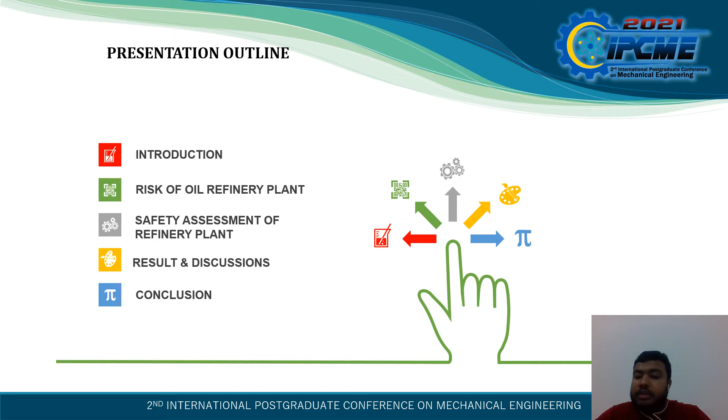These are the contents of our presentation: introduction, risks of oil refinery plant, safety assessment of refinery plant, results and discussion, and conclusion. This is a schematic diagram of an oil refinery plant. We know that in an oil refinery plant, crude oil is refined into different kinds of fuel, like jet fuel, diesel fuel, fuel oil, heavy fuel, gasoline, etc.

This is not our main concern to discuss the oil refinery plant, but our concern is to know the idea about the oil refinery, because we want to make the safety analysis of these oil refinery plants.

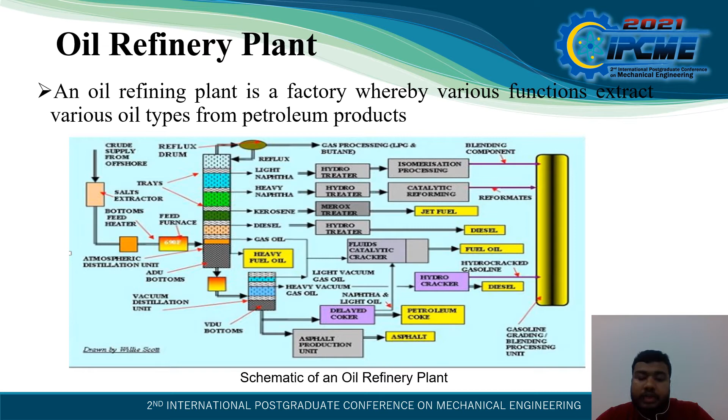This is the true figure of petrochemical companies' fire explosions. One is from China, in 2005, at Jilin petrochemical company, a fire explosion. You can see figure 1, top figure, and the second figure is for Jubail petrochemical company in Saudi Arabia. It happened in April 2016. A lot of people died and a lot of people were injured, and not only that, but the effect after the fire is heavier.

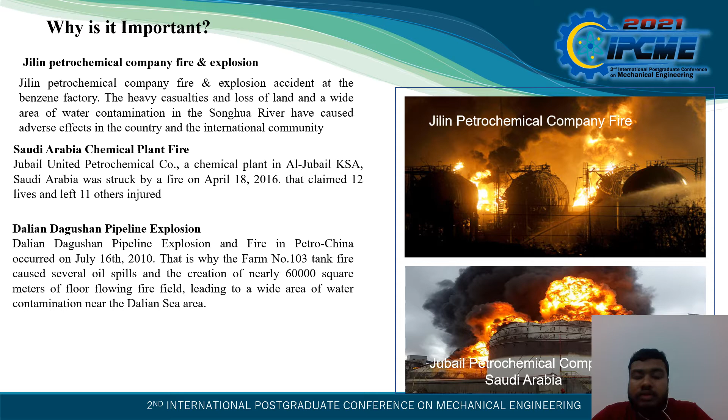In the next picture, you can see the river water is polluted by the burning fuel and oil, and you can see the firefighters are swimming in the river to rescue people. For this reason, we are very much concerned about fire and safety analysis in oil refinery plants, and that's why this is our study.

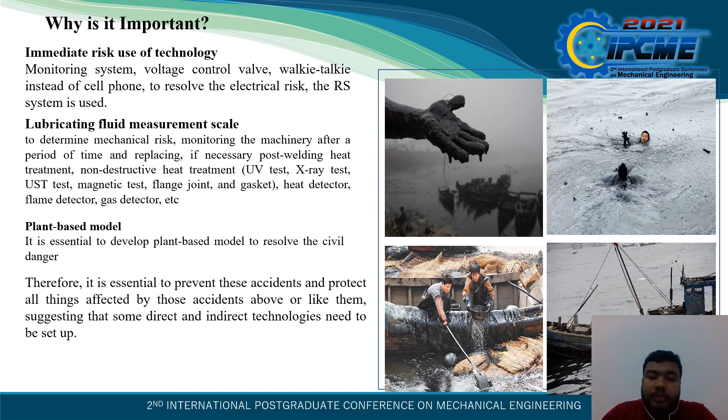After this background, we want to reduce oil refinery plant fire. First of all, we try to find out the risks of the oil refinery plant, and for the risk assessment, we categorize 4 categories of risks: electrical, civil, chemical, and mechanical.

Each has some subsections: electrical is subdivided into short circuiting, high voltage and networking, whereas civil is construction, and chemical is excessive sulfur or excessive explosive reagent. For mechanical, a mechanical device may be damaged or the lubrication system may be faulty. In most cases, the final damage or final risk will happen by fire. So this is the risk factor.

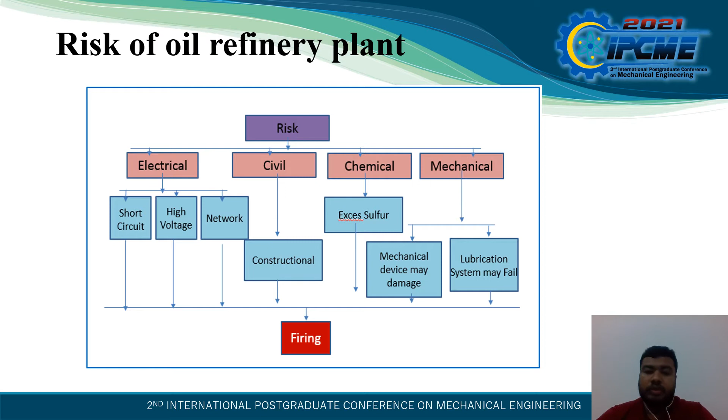For identifying risks and data collection for risk measurement, we interviewed some employees of a renowned oil refinery company in Bangladesh, and we collected data from the employee questionnaire and sensation, and we got some data according to our questionnaire and sensation.

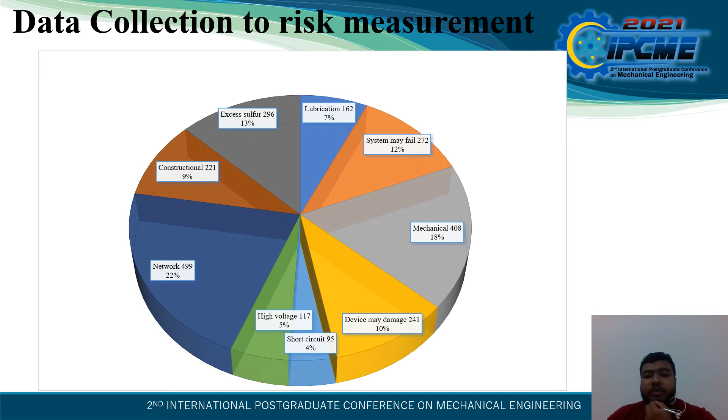We can see here most of the risks happen from the networking of the oil refinery pipeline; construction is 9%, and networking is almost 22%. For mechanical, device damage and lubrication system failure is around 18%. Another bigger one is excessive sulfur for the chemical reagent, that is 13%. You can see lubrication system failure and damage, short circuit or high voltage. These are the risk factors, and we collected this data among the employees of the oil refinery plant.

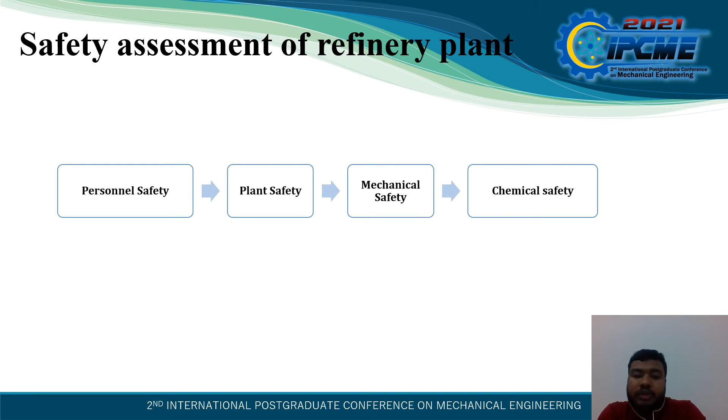According to these risk factors, we try some safety measures. We want to reduce the risks, and for this reduction, we have to maintain some safety assessment of the refinery plant. For the safety assessment, we categorize a few cases: personnel safety, plant safety, mechanical safety, and chemical safety.

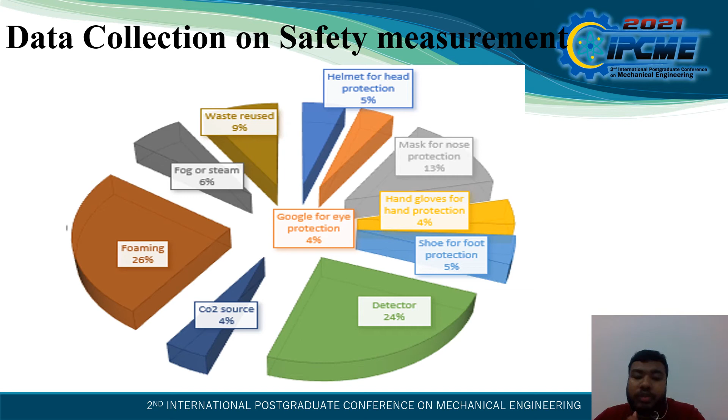According to the data of risks and safety analysis, we can conclude here as a result and discussion that for the risk factors of electrical, chemical, mechanical, and civil factors, in most of the cases the effects are firing and temperature rising, and in most of the cases the device may be damaged or production may be hampered.

But for the solution here, for the electrical purpose, electrical equipment, our solution is something like that. For monitoring, use voltage regulating valve, use walkie-talkie instead of cell phone, because walkie-talkie is good enough for connecting one to another. And for the mechanical cases, these are a lot.

There is a lot of equipment we can use here: X-ray test, magnetic test, UST test, and UV test, and also maintaining the lubricating oil system, and also maintaining the temperature in post welding heat treatment. And for the civil, the solution is construction based on safety. And for the chemical cases, we can reduce this firing by monitoring the level of the reagent.

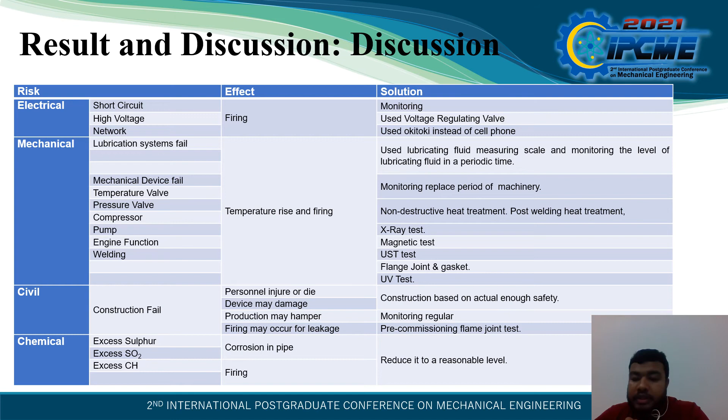This is our proposed fire hazard prevention and control model. For the fire control, we can divide this task into two ways. First is fire prevention, and second one is firefighting. Before firing, we can do fire prevention. After firing, we have to manage the fire, that is firefighting.

Before fire, we can see here we have to manage the plant, starting with plant design and plant installation. When we make a plant, we have to properly design it, like the piping and instrumentation. And for the installation, we have to establish firefighting system, assist and control, and alarming systems. And we can divide our plant into various zones, like safety zone, red zone, and emergency zone.

And for the work section, we have operation, maintenance, modification, training, motivation. And after a fire incident, we have to encourage them for the investigation, cause identification, why the fire happened, and steps for the rectification. And firefighting, if the fire already happened, then what should we do? A water reservoir should be there, and piping fire network, fire vehicles, foam extinguisher, etc.

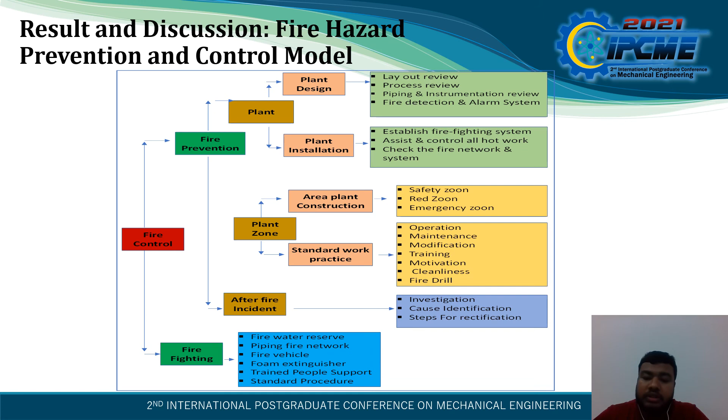In the conclusion, we are going to conclude here that every refinery plant should have an established fire alarm device, siren and whistle system present, and a written emergency plan in a popular position. There should be a popular position in a poster form. Maintain direct access to building and location, warn security staff, and alarm to open the gates and doors.

And in both the domestic and industrial areas, fire is a preventable occurrence. Due to this, massive losses are suffered by the industry every year. To ensure the facility's proper protection, each industry should have safety regulation, fire control and emergency preparedness evacuation plan.